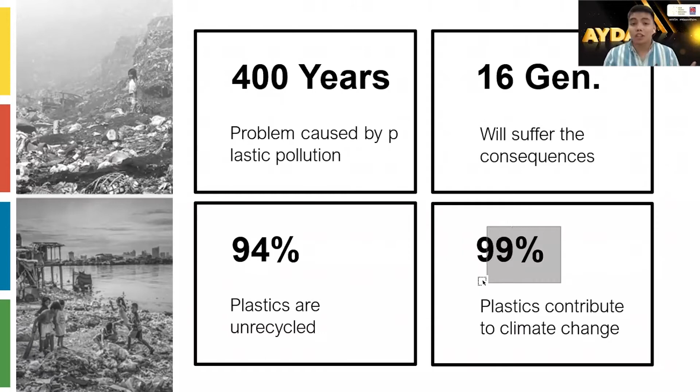Every day since its invention, the plastics we use end up in sanitary landfills. Little did we know we have already created a 400-year problem due to plastics, leaving 16 generations to face the consequences of the waste we make today. According to the World Wildlife Fund, 94% of plastics are left unrecycled. Alarming, isn't it? But what's more alarming is that 99% of which contribute to climate change due to mismanagement. These plastics over the years turn into microplastics that contaminate the air we breathe, the food we eat, and the water we drink, causing more than 1 million deaths annually.

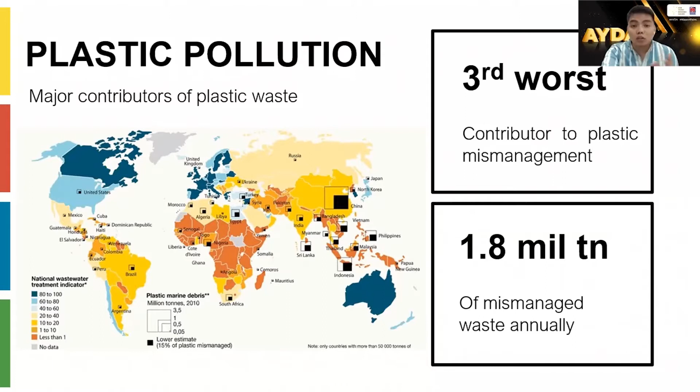Fact is, the Philippines is the third worst environmental offender in the world because of mismanaged plastic, contributing 1.8 million tons of such waste yearly. We have so much waste that all landfills in Manila are predicted to close in the next 15 years. If this happens, those areas will be left unusable for at least the next 1,000 years, the number of years needed by these plastics to decompose. That would place the inhabitants in unhealthy, even worse, dreadful situations.

We have already seen this in the case of Smoky Mountain before it was closed down. Smoky Mountain is a 50-meter high trash pile in Tondo, Manila, which has claimed countless lives and continues to affect thousands of families. The garbage mountain is situated near a tenement housing. In 2015, the National Housing Authority, a government body concerned with providing housing in the Philippines, deemed these buildings dangerous due to cracks, and therefore planned to demolish them.

But I am positive there is hope in this. I believe that this area will be the best place for Sustaina-build's ground zero. Though initially designed for 2,000 families, this 34-building tenement housing is now home to 4,000 families. Each three-story housing is overcrowded with occupants belonging to the poorest social groups of Manila.

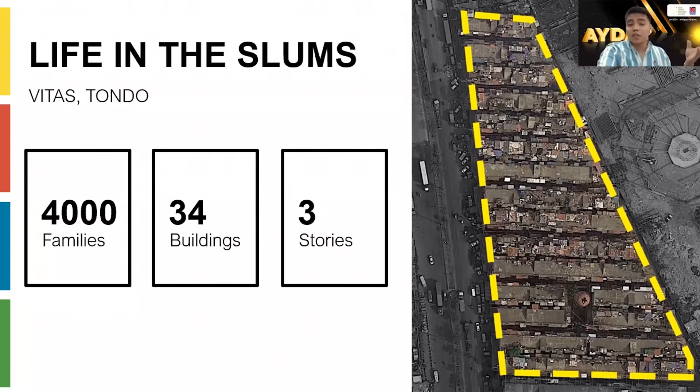According to the National Housing Authority, the Philippines has a 6.8 million housing backlog, and 42% of that, or 3.2 million, is concentrated in Manila, where slums living in danger zones are prominent. These tenement housings are no longer safe for habitation. Aside from structural deterioration and fire hazard, its proximity to Smoky Mountain adds to the uninhabitability of the site. The 4,000 households living in Vitas have no choice but to live in these cramped structures with no green spaces and an unsafe environment.

A study conducted in 2012 shows that pneumonia is the leading cause of unnatural death among residents who live in this area. These deaths are caused by fumes, poor sanitation, and unhealthy air from the nearby landfills. The demographics most affected by this are the children and elderly because of their frail health condition.

I personally witnessed all this, and it made me think: what if we can sustain the rate of waste reduction while building housing for the homeless at the same time? I realized the solution is Sustainable Build, or simply Sustaina-build.

Sustaina-build wanted to provide a concept that utilizes waste in landfills as a driver for a more sustainable way of providing housing while lessening hazardous waste. It is also a concept meant to integrate 3D printing technology with waste management facilities to make byproducts that can be used in constructing cost- and time-efficient housing.

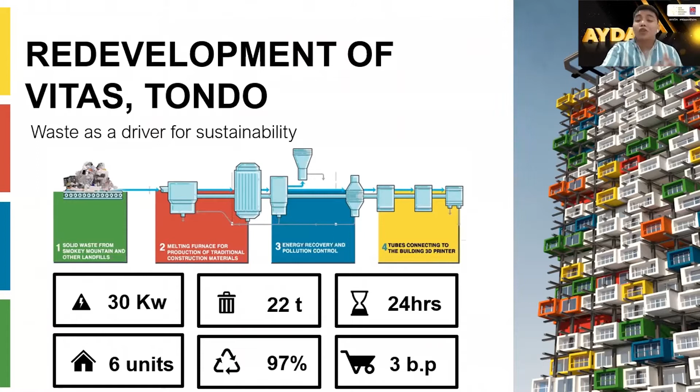This system can generate 30 kilowatts of electricity, repurpose 22 tons of waste, with 97% of those being recycled, to make 6 units of housing in just 24 hours. Not bad. In retrospect, we generate 11 tons of waste each day. Using this technology, we could utilize these 11 tons and gather 11 tons more from our landfills.

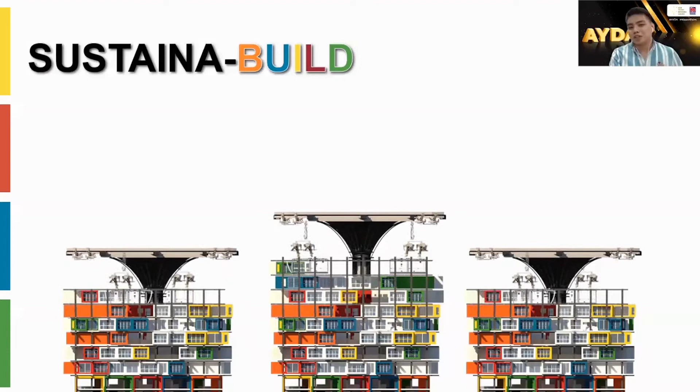This can be achieved by developing a large-scale reusable 3D printing machine to be attached at the top of the structure. The waste, which will be treated, repurposed, and recycled, will be processed in an adjacent waste management facility to generate filament which will be used as building material. This will be delivered to the 3D printer using the filament shaft.

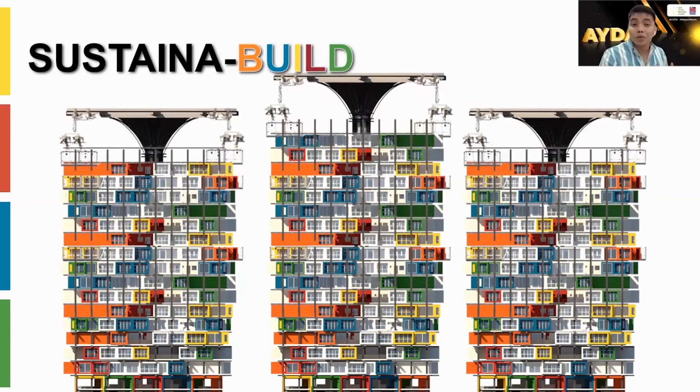After printing all those 1,000 units in each structure, we would have converted 3,700 tons of waste into safer, cleaner, and healthier housing for those in need. We wouldn't have to wait 1,000 years to utilize the land we dump our waste into.

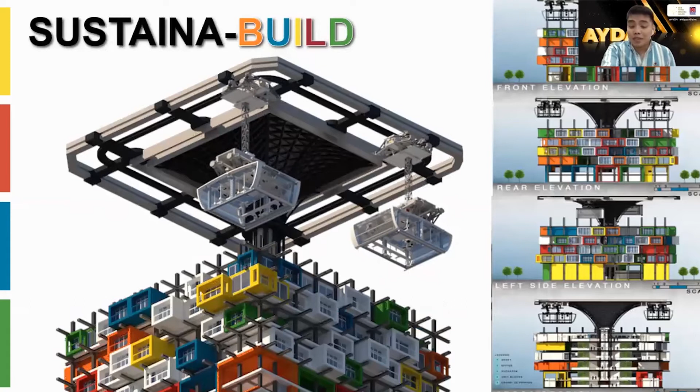This concept merges and improves the basic principles of waste management, construction, and printing into an immediate yet sustainable solution for a long-term problem. Sustaina-build ensures an environmentally sound and healthful future.

Sustaina-build takes into account the cost, time, adaptability, and sustainability of the structure. 3D printing through Sustaina-build lessens the cost and time needed for transporting materials, workers, and equipment.

One notable difference of the two is that the traditional construction method generates 30% material waste, something that Sustaina-build does not have since waste is its material.

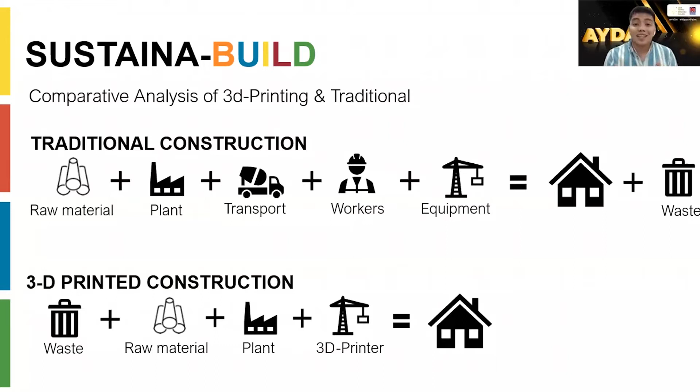Furthermore, as we can see in the chart, 3D printing can lessen resources by cutting off time by 77%, cost by 60%, material by 70%, manpower by 90%, and wastage by 95%, making it a more sustainable option for the project.

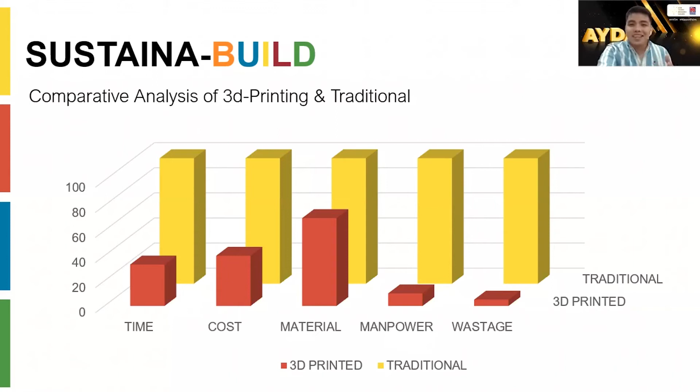As for the form concept, Lego blocks were chosen because of their ability to push boundaries in creating models that are imaginative but architecturally intuitive.

A basic block of Lego allows us to create something from practically nothing. The same principle is shared by Sustaina-build. The solid waste serves as a basic block that can be a potential part of a huge relevant project. In this case, a solution to housing backlog.

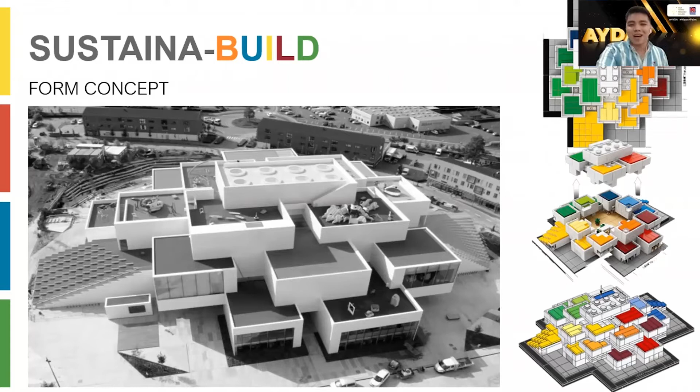Each flexible unit is designed to accommodate varying household sizes through its modular system of construction. The openings exceeded the required 10% minimum in the Philippines, allowing lesser use of artificial lighting and ventilation.

The shapes were conceptualized from the altered units of the Vitas tenement that are staggered due to the renovations done by the residents to laterally expand their units.

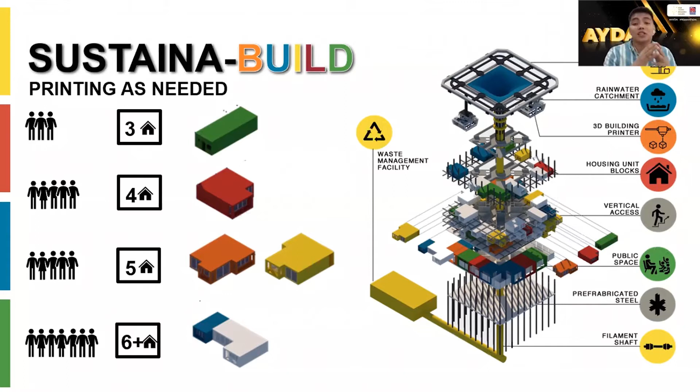The development is composed of 5 high-rise housing units for 5,000 families. Aside from the environmental benefits, Sustaina-build provides a learning center for children.

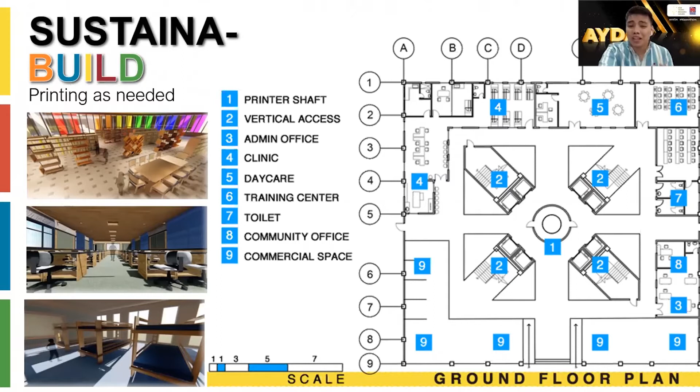It also addresses the economic and governmental aspects of the community through a training room, commercial spaces, and community offices. Through Sustaina-build, the tenants are given better access to opportunities which are usually missing in slum areas.

The upper floors will be printed using a tunable 3D printer, which can print 3 units a day using 12 tons of filaments. Sustaina-build can construct 1,000 units in 166 days.

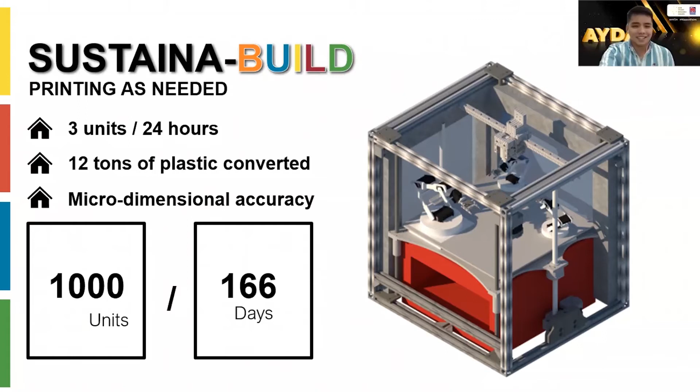Amazing, isn't it? Due to its accuracy, piping systems and basic fixtures will also be printed. The units are entirely customizable depending on the needs of the users.

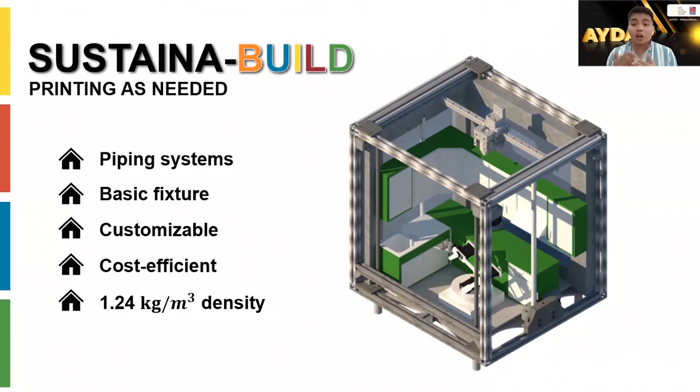The concept uses waste as building material, which would mean that cost is at its minimum. Each of the 5 housing facilities can hold 1,000 units, with every floor containing spaces for hydroponic gardens, rainwater catchment, and solar power systems, thus making Sustaina-build a self-sustaining structure.

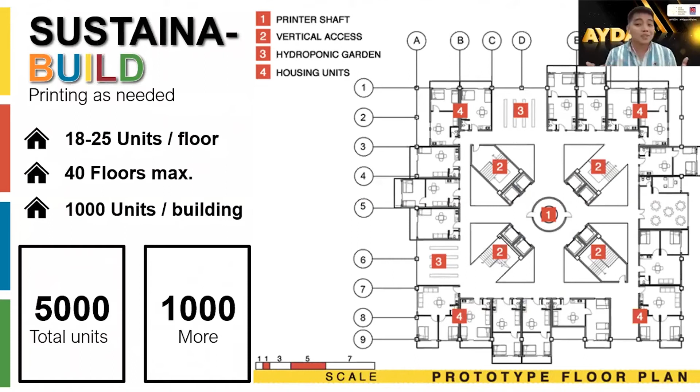Since Vitas at present has 4,000 families, this 1,000 unit excess is important to make Sustaina-build a driver for movement for the remaining informal settlers within the area.

A typical barong-barong, or makeshift house in the Philippines, has an average area of 10 square meters per family. Moving 1,000 families into Sustaina-build would allow the government to reclaim approximately 10,000 square meters of land. In turn, the reclaimed land may be used as a site for building more Sustaina-build housing.

As for my color inspiration, I chose these dynamic colors from Nippon to improve the character of my site. The colors are completely different from what we see in slums. Grays, wood, bare concrete, and roofing is how we identify poverty, and so does its dwellers.

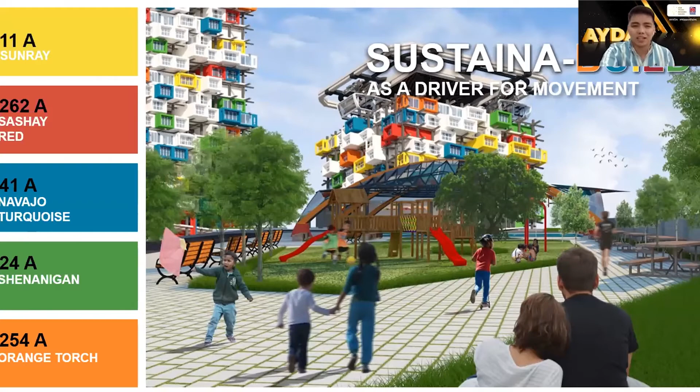By using Nippon's colors, Sustaina-build was able to humanize the culture of the less fortunate and design a soulful shelter, not for the slums, not for the homeless, not for the poor, but for people in general.

Again, this is Sustaina-build, trying to be part of the solution to possibly end waste problems while reinventing housing as we move forward to a more sustainable future. Thank you, and may we always build.